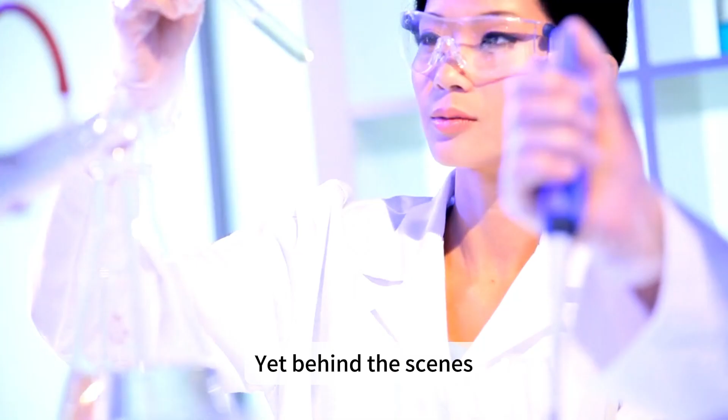If you bought an electric vehicle today, whether it's a Tesla, a BMW, or a Volkswagen, there's a very high chance that the most important part inside your car was made by a company you've never heard of. This company doesn't sell cars, it doesn't run big global ads, and outside of China, most people barely know it exists. Yet, behind the scenes, it powers a huge part of the global EV revolution.

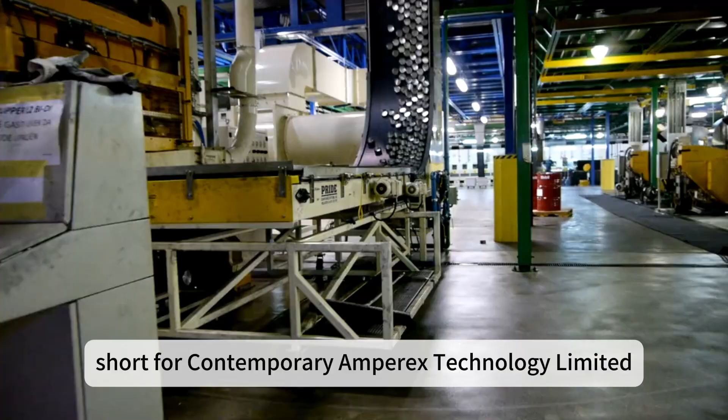That company is CATL, and once you understand what it does, you realize this isn't just a company story, it's about who is starting to control the future of energy. CATL, short for Contemporary Amperex Technology Limited, was founded in 2011 in Ningde, a relatively unknown city in China. In just over a decade, it became the largest EV battery manufacturer in the world, supplying companies like Tesla, BMW, Mercedes-Benz, and Volkswagen, at one point holding roughly a third of the global market.

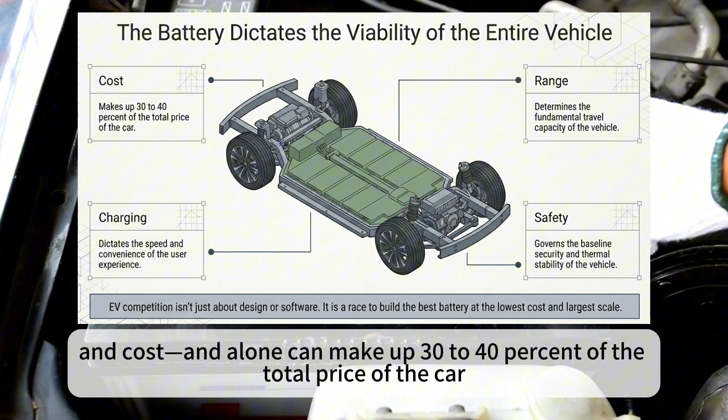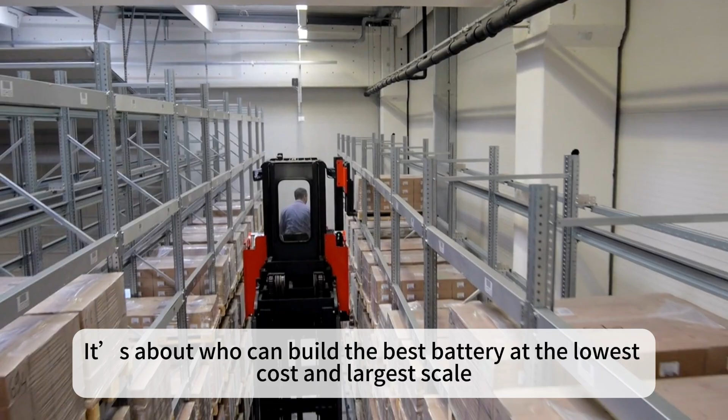To understand why that matters, you need to understand one simple idea: in an electric vehicle, the battery is everything. It determines range, charging speed, safety, and cost, and alone can make up 30 to 40% of the total price of the car. So EV competition isn't just about design or software, it's about who can build the best battery at the lowest cost and largest scale.

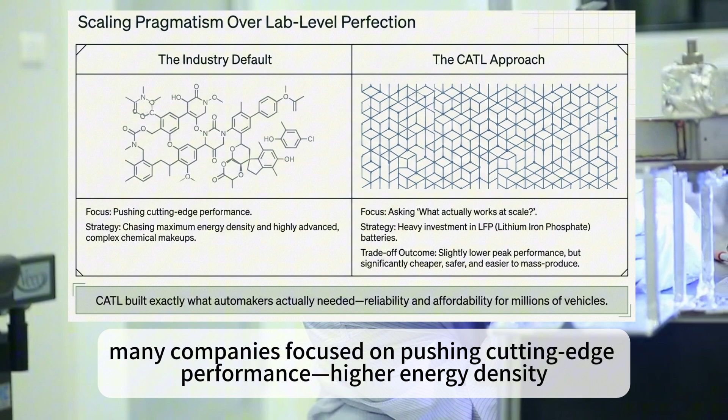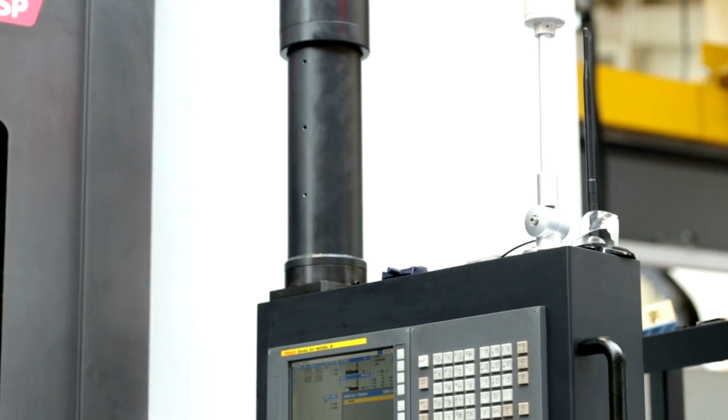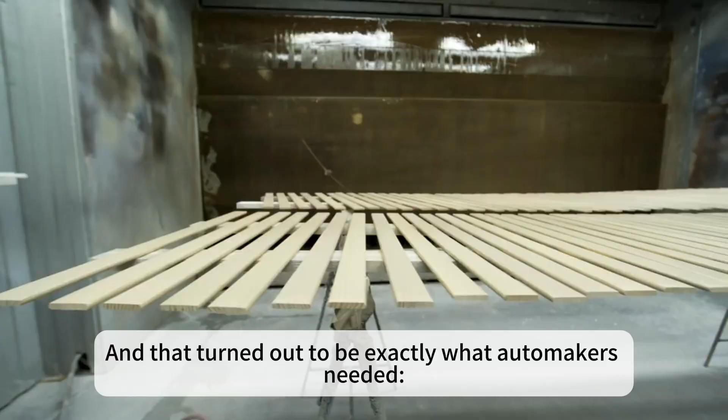That's where CATL built its edge. In the early days, many companies focused on pushing cutting-edge performance, higher energy density, more advanced chemistry. But CATL asked a different question: what actually works at scale? Instead of chasing the most advanced option, it invested heavily in LFP batteries, slightly lower in performance, but much cheaper, safer, and easier to mass produce. And that turned out to be exactly what automakers needed, something reliable, scalable, and affordable for millions of vehicles.

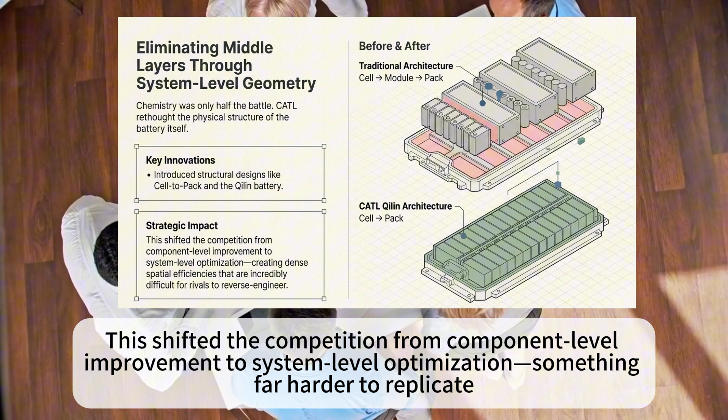At the same time, CATL didn't just improve battery cells, it rethought how they are structured, introducing innovations like cell-to-pack and the Qilin battery. This shifted the competition from component-level improvement to system-level optimization, something far harder to replicate.

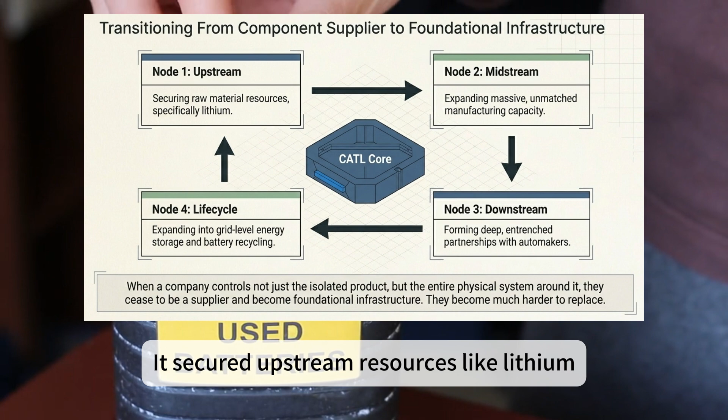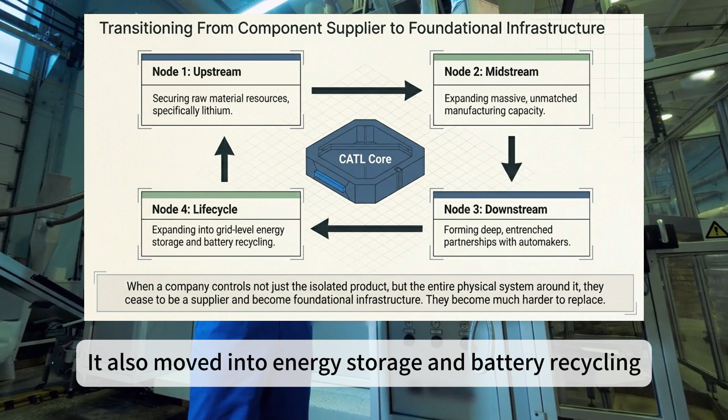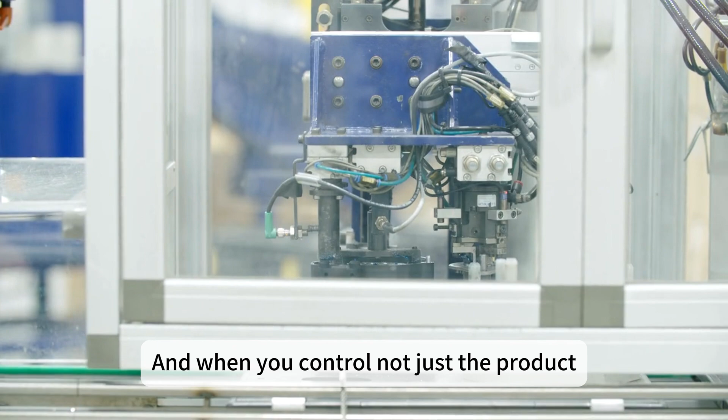But CATL's real advantage goes beyond technology. Over time, it built an entire ecosystem. It secured upstream resources like lithium, expanded massive manufacturing capacity, and formed deep partnerships with automakers. It also moved into energy storage and battery recycling. In doing so, it stopped being just a supplier and became something closer to infrastructure. And when you control not just the product, but the system around it, you become much harder to replace.

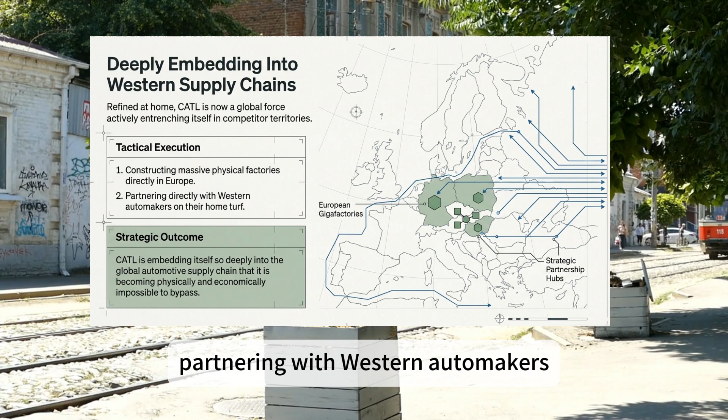There's also a bigger context behind its rise. China is the largest EV market in the world, and that scale creates powerful advantages. Larger production drives costs down, and faster iteration improves products more quickly. CATL used this environment to refine its technology domestically, then expand globally. Today, it's building factories in Europe, partnering with Western automakers, and embedding itself deeply into the global supply chain. At that point, it's no longer just a Chinese success story, it's a global force.

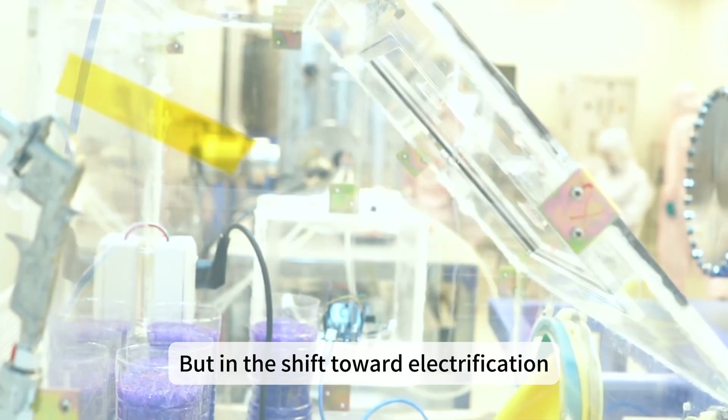And when you zoom out, CATL represents something bigger. For decades, key technologies were dominated by companies in the US, Japan, and Europe. But in the shift toward electrification, new players are taking control of critical parts of the system. Batteries are no longer just components, they are the foundation of the next energy era, and CATL is right at the center of it.